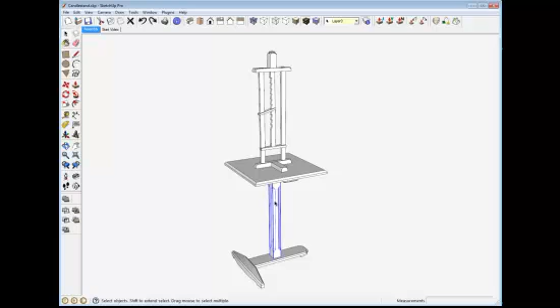To make this post, we start with the blank. In this case, it's 2 inches by 2 inches. Edit the component, and we'll need some guidelines to help us make one of these chamfers. First, a guideline that positions the peak of the chamfer point, and then chamfers on the side faces. In this case, it's 5/8 inch from the edge. Then I need one more guideline which shows the size of the top part of the chamfer.

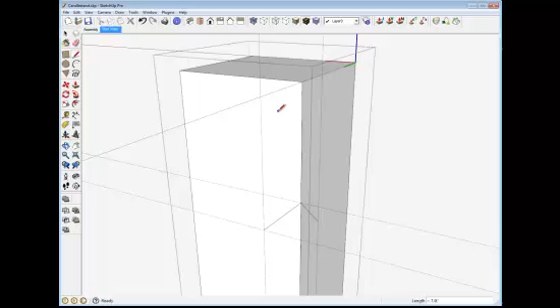Then I pick the line tool and draw some diagonal lines as shown here, and notice as I draw this one I'll get an inference over to the other side, which allows me to draw that line inside. We'll look at the x-ray to see if it was successful, and yes, there is the triangular face.

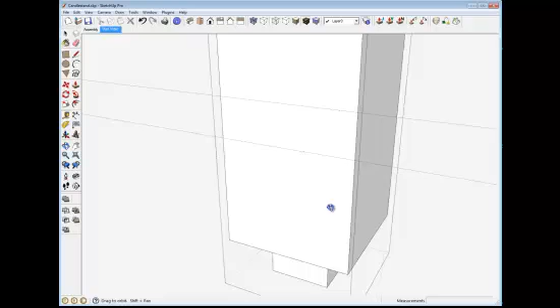We need a similar operation at the bottom of the post, so we'll put in those same guidelines here. And pick the line tool and draw those diagonal lines first on the face, then on the other side, and watch for the inference, click, and then draw that line that's hidden. Looking at x-ray, I can see that I get the triangle face.

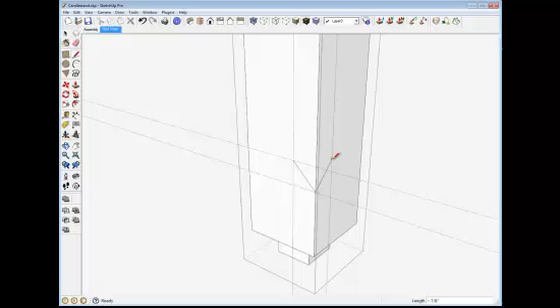Now we need to draw the vertical edges of the chamfer and pick the eraser tool to knock out the waste, and we have the first chamfer.

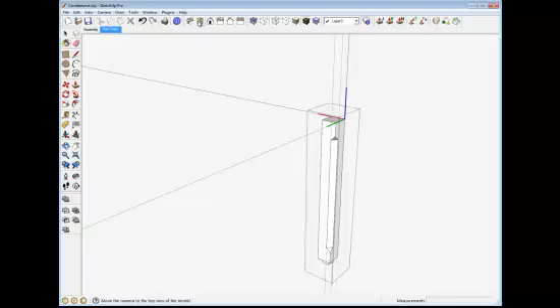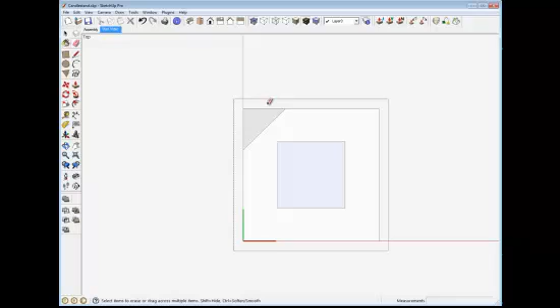Now, how do we copy that one chamfer to the other 3 corners? I picked the top view icon, and I'm going to change to x-ray so I can see the chamfer. We're in perspective view. I also want to be in parallel view in the camera, so I'm changing to parallel view, zooming in, and you can see now the chamfer on that left upper corner, which we need to select.

Pick the select tool, draw a select box around it, and we've chosen the chamfer for copying. Pick the rotate tool, and I'm rubbing against the edges here to find the midpoints, and then it comes over and it grabs the center.

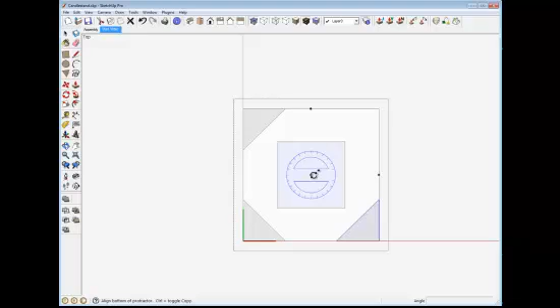I click the rotate tool on the center, and I hit the Control key to get a plus sign so that I'm adding the chamfer and rotate over, and I'll just repeat that action again for each of the corners. So I pick the Control key and then go 90 degrees, click, and finish the extra chamfer. Again, find that center point, rotate 90, and we have 4 chamfers.

We'll look at the overall view of the leg, and we need to erase those front edges to clear out the waste in these new chamfers.

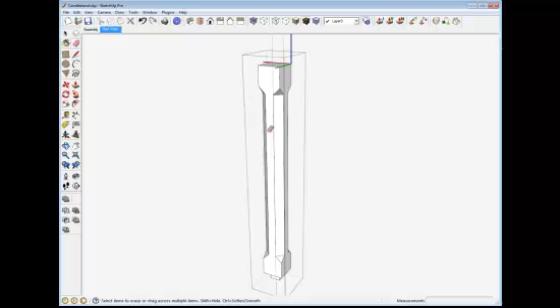And we've got a finished chamfered post. Close the component. Oops, there are a couple guidelines I need to get rid of. Erase those, close the component, and we're finished.